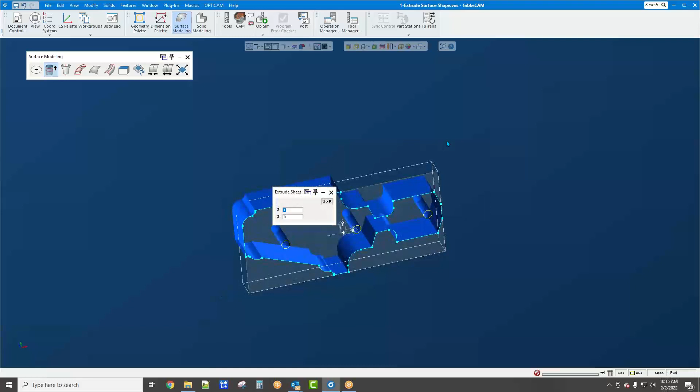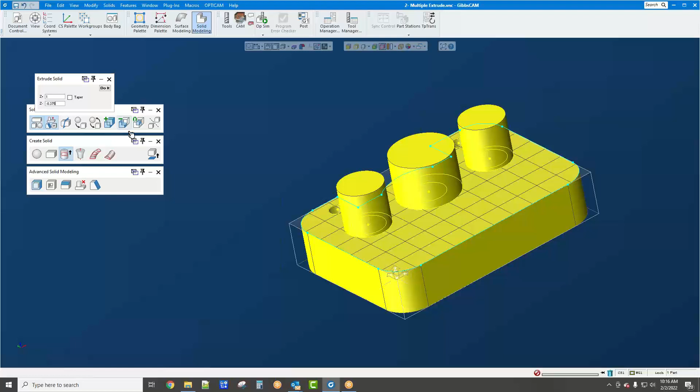So that's extrude a shape. A lot of you guys might have already noticed that we can now extrude multiple shapes. In the past, it was always one at a time. So if I go here and select, let's say, these circles, after the outside shape, of course, I can go in here and say, here, let's go -1. You can extrude those all together. And then maybe a couple C-bores, I might go -0.25 and 1 inch to give me something to hang on to. And then -0.375 here, for example. So you can extrude multiple shapes at one time. I think that's huge.

And these, by the way, all pertain to solids and surfaces. Let's open up the third one, which is extrude with taper. In the past, when we went to do a taper, you guys probably remember you were limited to one field. So now, if I select the shape, I can go both directions with the taper. So that's pretty sweet as well.

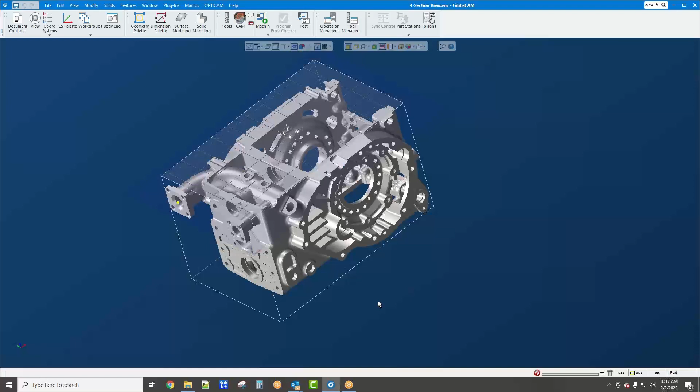This next one, the jury is kind of out on this for me, which is called section view. This is a little bit bigger file, so it takes a little bit to open. So the section view icon is up here, show section view, and it's really kind of hard to see, but you see our axis markers over here. As soon as I roll my mouse wheel on top of it, we can drag this down to see the inside of our model.

Now, to me, I'm like, okay, yeah, that's fine and dandy, but I think they need to, and I've already submitted a request for this, is to be able to pull geometry off. And just like slice plane, when you're in this mode, you can right click, if I can find it, and set section depth to like this. But to me, you need to be able to pull geometry off it as well.

But we are also able to pull, not to interrupt it, but we are able to pull geometry from that view because we can set our depth. We can set the depth of what we used to call profiler and pull geometry that way. Right. I mean, it would be nice. I agree, it's not one to one, like we just do it in one click like most commands in Gibbs, but you're still able to pull geometry off of this. So it's still usable. It's just not as efficient as we want it to be.

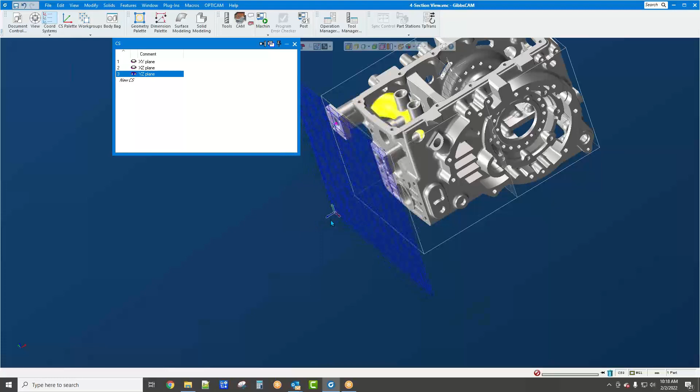So it also will work in different planes as well. So I can drag this in like this and see the inside of your model. And if I go YZ plane, same thing here. Okay. So that's section view.

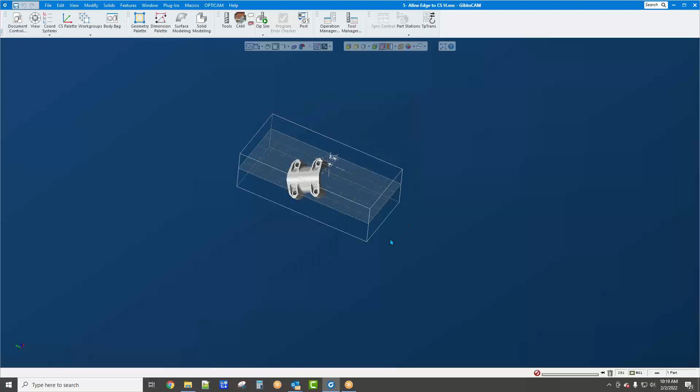This next one I think is huge, particularly for new users, because one of the biggest struggles for a new user is, hey, how do I get my model in place, in position? So we have this align edge to CS horizontal. So I can select, let's say I turn face select on, select this face and go align face to CS, okay?

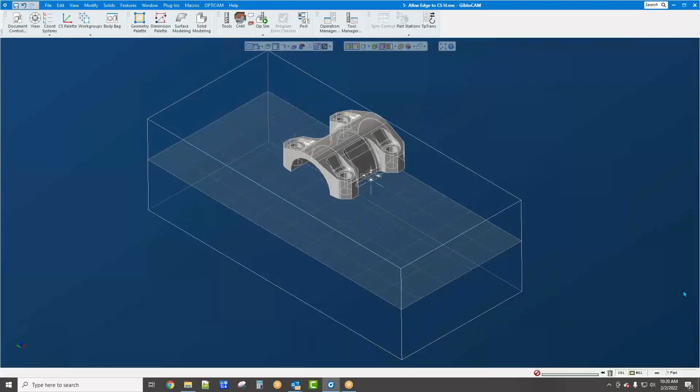Now, one thing a lot of people might not be aware of, and I forget when they added it, is if I go here and go align face to CS again, it'll flip the part over, which is pretty cool. So now if I turn edges on, I can select this edge and align edge to CS horizontal, and it will straighten that part out. So that one I think is a huge addition. So play around with it. You'll see it works really well.

The next one here is basically, I think, a quantum leap if you do any surface modeling at all. It's like, where have you been all my life? If I go here in this plane here and click create a surface, in the past it would always create it at 0. Now it creates it right where CS sits, which is really huge for those of you who use the surface modeling palette.

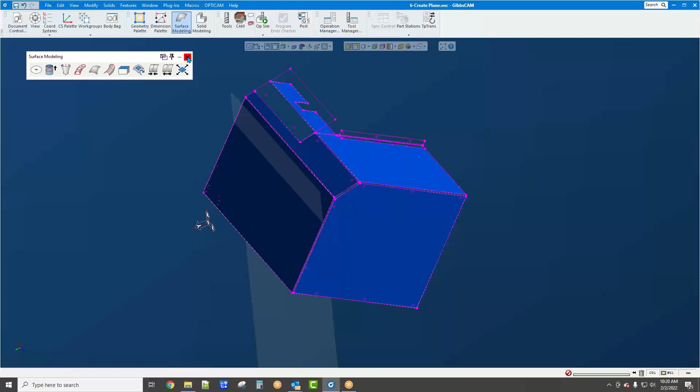So you can very quickly just create your planes and not have to translate them up from 0. Because like I said, in the past, they would all be at 0. Now they can be in any orientation, and you can create a surface based off the 2D geometry. It'll stay right where it's at. Okay.

Oh, my meeting thing's in the way. 1 second.

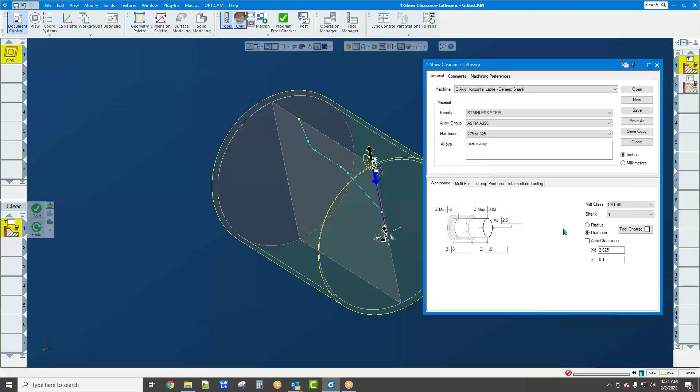Now let's go into visualization and simulation section. So I'm going to go show clearance plane lathe, which is the next function. And there's a button up here, right here, which is show clearance planes. So if I double click this, it's going to show me my clearance plane in like yellow. So if I go change my clearance, let's see, in my document control to 4 inches, let's say, it's going to show you your clearance plane. So pretty sweet.

And we can also do the same thing in mill. So if we go to mill, it's going to show you your clearance plane right here, and that's going to be your master clearance plane. So once again, if I kick this up. Okay.

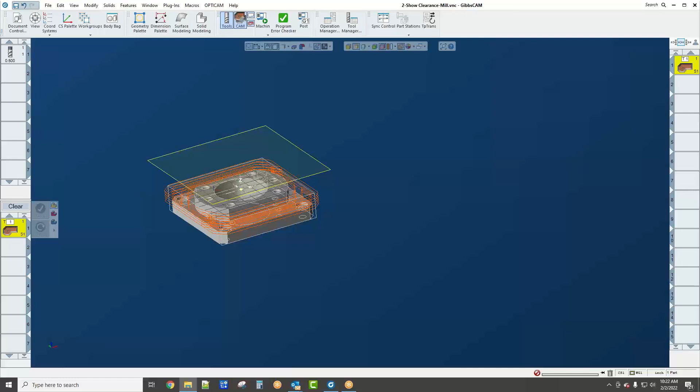The next one is multi-part visibility in all sim modes. So I'm going to go ahead and turn on OpSim. So once again, this is multi-part. So we've got multi-part duplication here. So in the simulation button, and when they say in all modes, that means in machine sim and OpSim, you'll notice this new button here. So if you choose not to show all the parts, you just click this button. And that toggles the visibility of the multi-part.

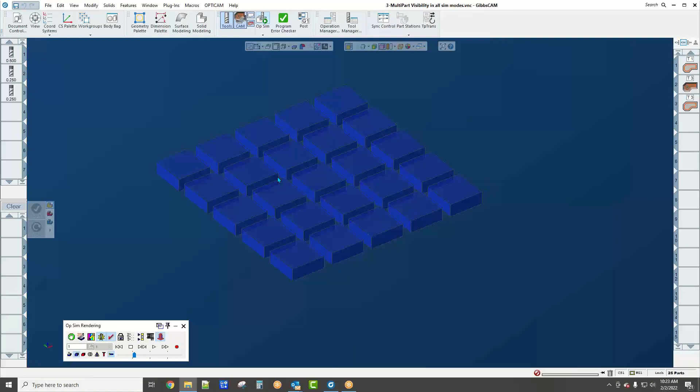The next one is pretty huge as well. MTM Sim Playback. Oh, bear with me a second. Let me load it just as a VNC.

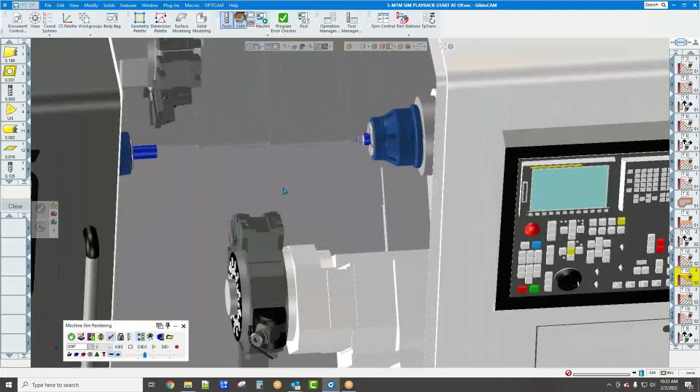Okay. When we go into Sim, let's suppose I want to sim just a particular op. I'm going to go to, let's say, op 12 in the subspindle. I'm going to select that and click play. And you'll see, even though the main is still going through the motions, it's actually showing this part as it is transferred already, which it never used to do in the past.

So you can actually pick or select specific ops and simulate just that op. I think it's pretty huge for MTM. Okay.

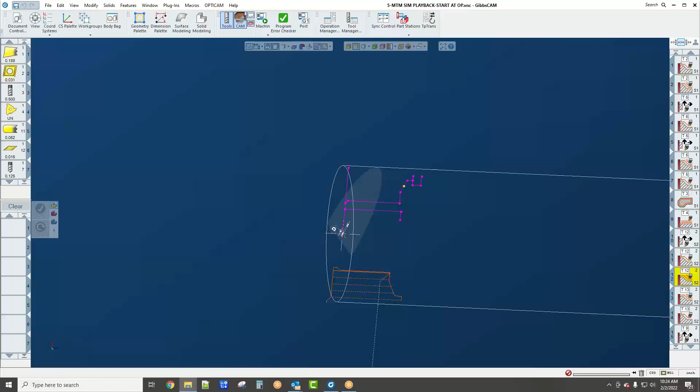Let's go on to our next section, which is kinematics and tooling. Now, I think this has tremendous potential, the ability you're going to see here. And it's what we call configurations, machine configurations. Let me turn off edges. Go to my document control. And now you'll see a new tab up here called configurations.

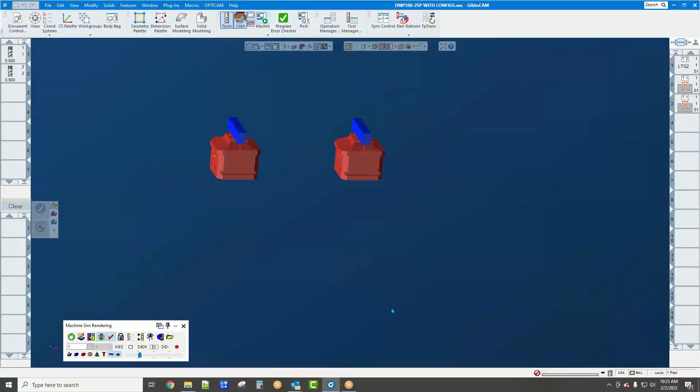So I just happen to have Nikken Indexer set up on this. And I've set up a choice for Nikken Indexer on the right side or Nikken Indexer on the left side. And it does all code out correctly. So if I turn on Machine Sim, and let's load that machine. This one takes a second to load. There we go.

So here we have Nikken Indexer on the right side of the machine. So if I play this real slow, and let's suppose you had another machine next to it, or the same machine, where several months down the road they put the Indexer on the other side. All I have to do is go in here into configurations and say, hey, I want that on the left side.

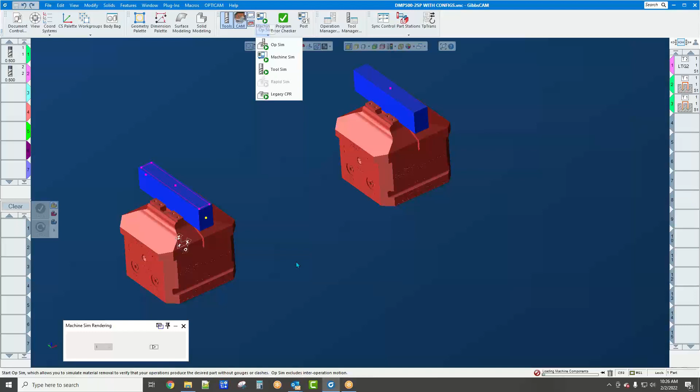So what's kind of cool about this is if you start thinking about this, you could do a lot of different machines, a lot of different configurations, which I have another example here shortly. So here's the Indexer on the left side. Just by clicking one button, we're switching configurations. So pretty sweet.

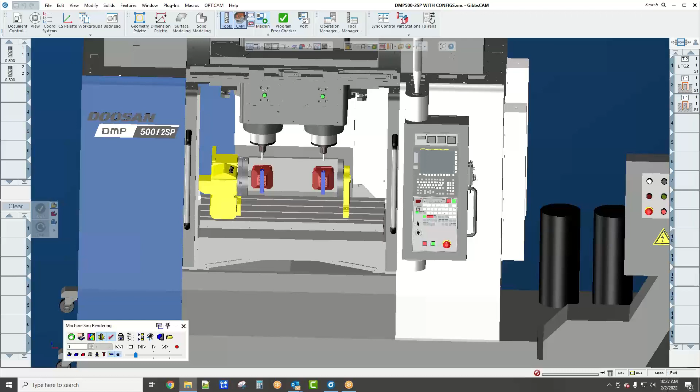Let's go on to another machine with 3 configurations. Okay, so this particular one has three configurations: indexer right, indexer left, or a part in the vise on the table, so with no indexers. So if I turn on sim, there's indexer on the right side of the machine.

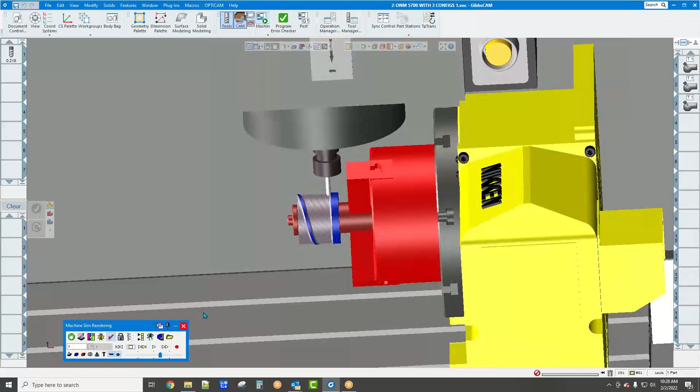Let's stop this. At least I've learned now not to try switching it while it's running. Let's go left side. There's the indexer on the left side running the same program. Let me center this a little bit.

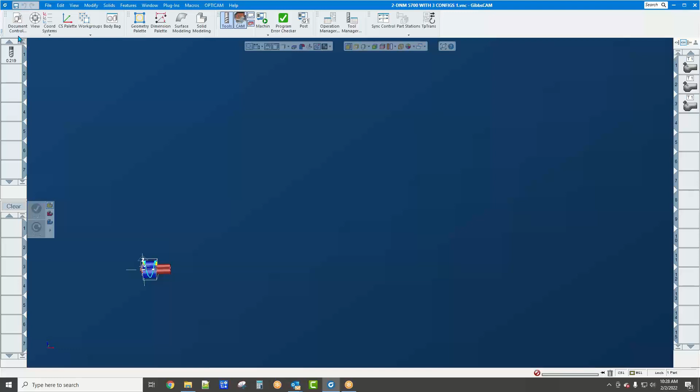So pretty sweet. Now, I did these files for an event at Ellison for GibbsCAM 2022. And the third one is just the one with the vise, but I could have put them all in the same program. I just didn't have time to do that.

So here we just have it in a vise, same machine, with the configuration part and vise. And just do a little bit of milling on that. Okay. And if you had a different configuration such as that, all in one file, the indexers would truly disappear.

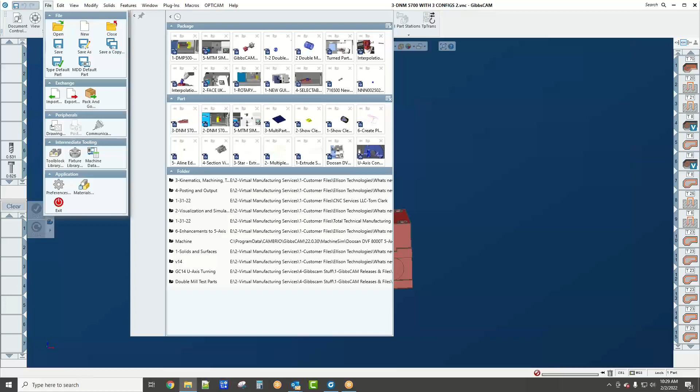One of the other new functions within the software is what we call Selectable Stock. And this requires a small change to the MDD, but here we are on a 3-axis mill, once again, same machine. And if I click cubic, our stock switches to a rectangle or square.

Okay. And if I turn off sim, switch it to round, you can have round stock without actually creating a stock model for it. Okay. And that's controlled in the document control.

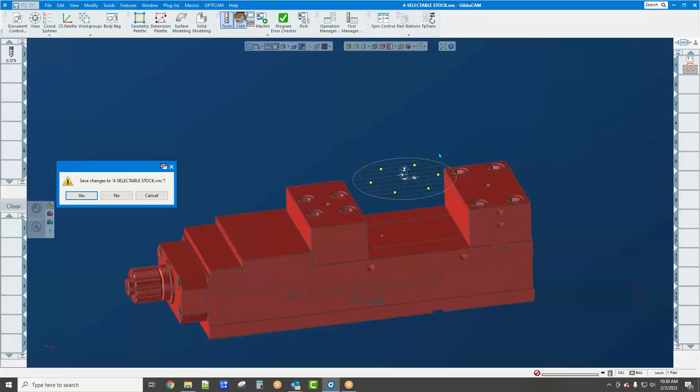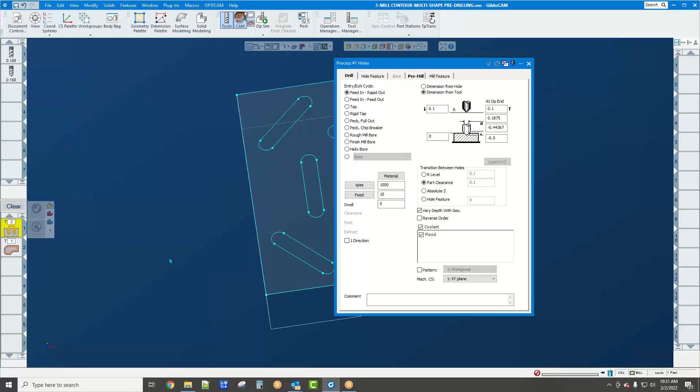This next one is contour multi-shape pre-drilling. I think this one's huge. And so I'm going to double click this op just so I don't have to refill stuff in. I'll delete it here on the right side, and I'll deselect these to show you how this works. I've got a standard drill process. Drag this over here. Standard drill process here, and a contour process here.

So here's the interesting part. Wherever I click is basically where it's going to drill the hole. So you notice I clicked on this line, on this feature. I clicked over here on this one. Let's click on the bottom over here, bottom right. Let's click on the top here, bottom here, center here, right here, and lower left here.

Click do it. Okay, and you'll notice if I go to my top view, this one's from the center, left, right, here, down to this bottom one here, this one, right, and bottom. So whatever feature that you click on, it's going to drill the hole off of that feature. So I think that's pretty sweet.

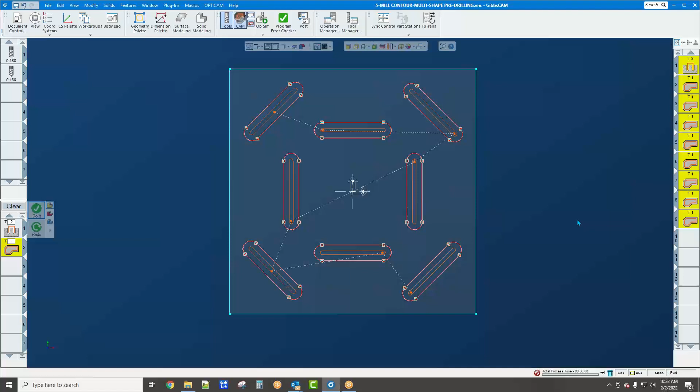Okay. Let's look at this next one. I kind of don't really understand what drove this one. Obviously, some customers asked for it, but it is square corners for roughing in turning. And I'm still trying to think of why, but I'm sure somebody has an answer out there for it.

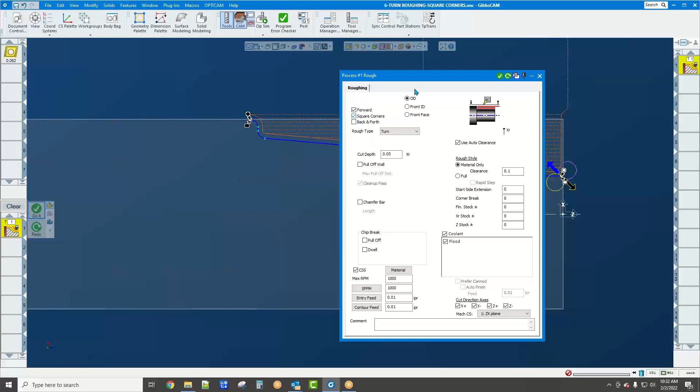But there's now a square corner checkbox in the turning. If I uncheck it and redo the op, it behaves as it did before. So square corners.

Let's move on. We're going to go to posting and output. And I'm sure you guys have noticed this is not really a new feature in V15. It isn't a new feature in 15, but we thought we would show it anyway because they've had enhancements to it. So I'm going to go ahead and simulate this first.

And by the way, this is done in Tombstone Management. So this has quite a few work offsets in here. So if I go to post it, we go to work fixtures, you're going to notice a different interface depending on how old your post is. So this is a .220A post, which 220 posts are version 2022 and above.

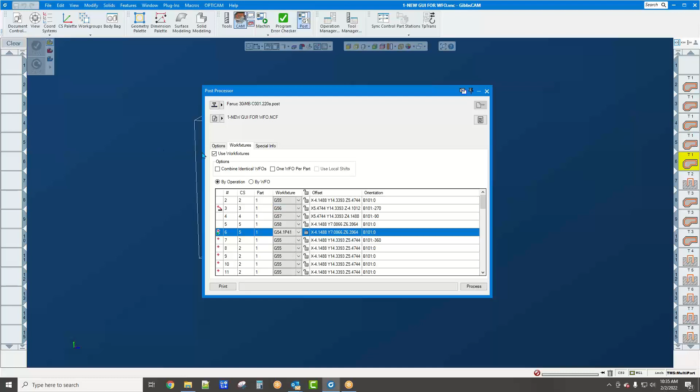And the previous post, you'll see a .68. I think it'll work in a 68 and past, whatever 14 was. Is that right, Zach? That is correct. Yep. So at any rate, if I go down here and let's look at, let's say this work offset, I can make this one 54.1 P41 if I want. And just use work fixtures. Let's go selected ops just to show you this. And it's going to output G54.1 P41.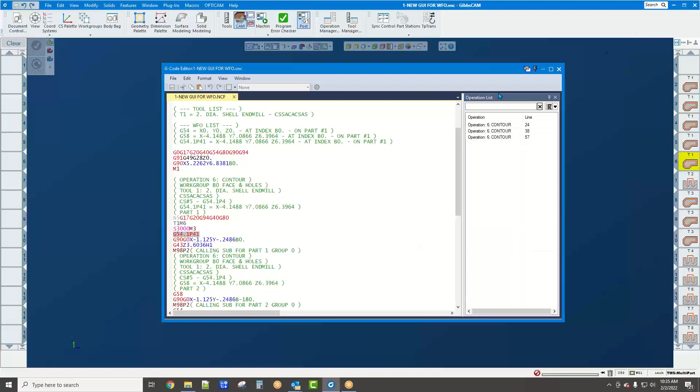Now you have several choices in here, whether you want to go by operation or by work fixture offset, okay? Let me close this out and reopen it, because we should see more than that. Oh, I have selected ops, that's probably why. Go ahead and check that, there we go. So by work fixture here, and it tells you which operations are using what work offsets, or by operation.

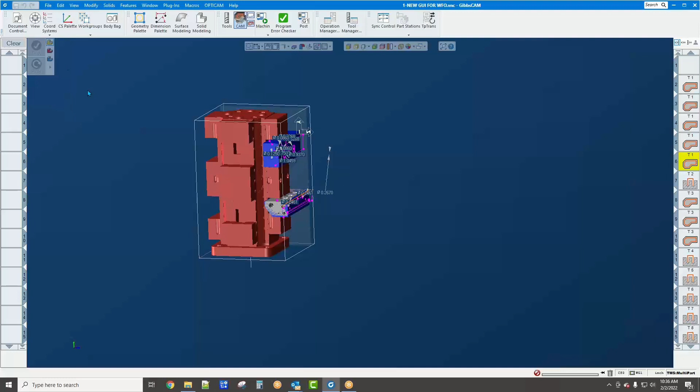Miscellaneous. I always like to, in these sessions, show some things people might not be aware of, and I don't know exactly what versions they were changed in, but if I go to preferences here, I just want to point out some things here. They did change, you know how you select rapid tool when you go to simulate? By show rapid tool right here. You now have the ability to change the color of the show rapid tool. So if I go to edit appearance settings and go to sim, rapid tool, you can now change the color. So that's one they added.

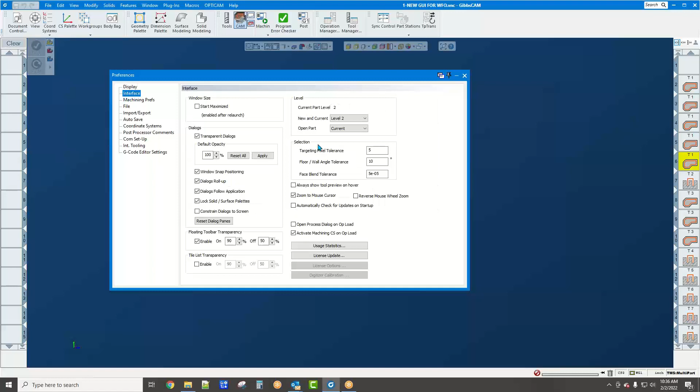Under preferences also in interface, this is one I like to show because a lot of people aren't aware of it. They have the ability to reverse the mouse wheel because a lot of people wanted the ACAD style mouse wheel zoom.

This one is huge. Activate machining CS on Op Load, which means that whatever coordinate system, when you double click an op, it's going to jump to that coordinate system. See how that happened right there? Which that is sweet, particularly those of you who do 4 and 5 axis stuff on a regular basis. You would always in the past go up here and switch to that coordinate system. Now when you double click an op, it's going to jump to whatever CS it was created in. I think that is huge. You can turn that on and off, by the way.

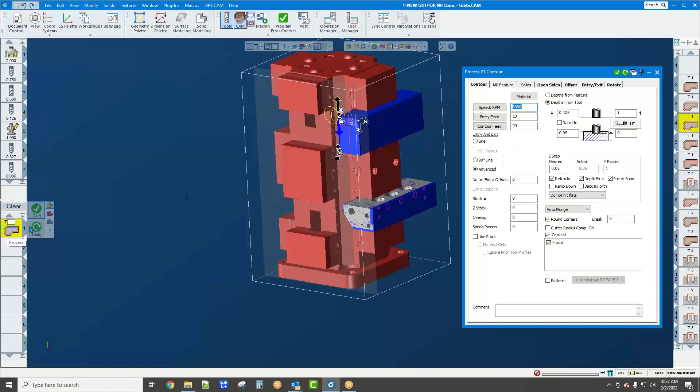If I go back to preferences, this one I turn on and off all day long. Open process dialog on Op Load. So if you ever get tired of, when you double click, let me turn on my tools here, having to go over here and open it up, and you want to change a bunch of ops in a hurry without using Op Manager, for example, when I double click here, it's going to automatically open this process dialog for me so I can either make changes or whatever I want to do.

That's one I turn off and on all day, because sometimes this will get in the way. If I'm wanting to manipulate some geometry and I'm double clicking ops and this is showing up in front of my geometry, I'll go turn it off. So that's under File Preferences. Activate Open Process Dialog on Op Load, which I'll turn off for right now. Activate Machining CS on Op Load.

One of the other functions now is called Break Parent-Child Link. So those of you who use Transform Toolpath, such as we've done here, we can now separate out individual ops so they're not with that. So if I wanted to skip these two, for example, normally you could just throw them out, I guess. But if we go in here and say, man, I got to look for this one.

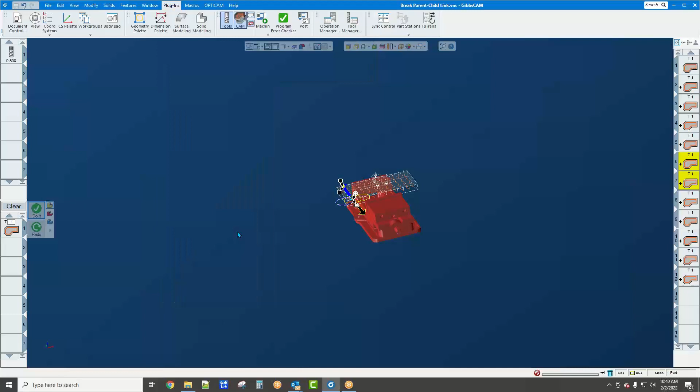Bear with me. I wonder if that's one we turn on and off. It is not. Dave, you passed right over it. It's at the very bottom of the list. Not in the plugins, in the turn on. Oh. It's like second or third from the bottom. Down here? No. Go back into add-in plugins. Not where you're at right now to turn them on. Oh, okay. Plugin Manager? Yes, sir. Tool. Oh, I did do that. That's my fault. I misread. Yeah, no biggie.

It used to be, and I don't know, I'm just either being blind right now, but there's an icon right here. I'll post it, you guys, I might have to reset my plugins. Let me see if that will fix it. Plugins, reset. I don't see it. So I will let you guys know. We could probably post that somewhere, right, Zach?

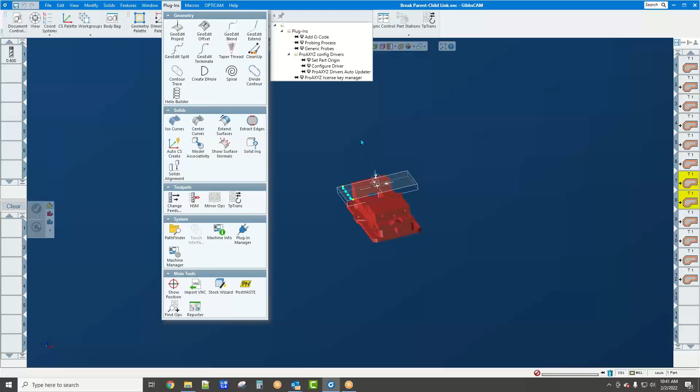Yeah. I know it was there, so when I install the new software, it might be a matter of turning it on. But you can actually break the association, the parent-child association with link. Let me try, that was a pack and go. Let me try it here with a VNC file. So it might not let you do it on a pack and go. I don't know. Plugins. Still don't see it. Okay. We will post something to that nature of what we need to do to make that active. So it will break the association to where when you double click your ops, these two would not be in there.

Let's see, a couple other things. One of the things you guys will notice when you're installing GibbsCAM, and for the first time you create a file, for umpteen years, it's always been tool length offset 1, cutter comp offset 51. They updated it to where now it's just H1D1, which is like, yay. Let's see, any of the other things, they've supported some new CAD file formats. I've covered everything else that way. So now let's go into 5-axis enhancements.

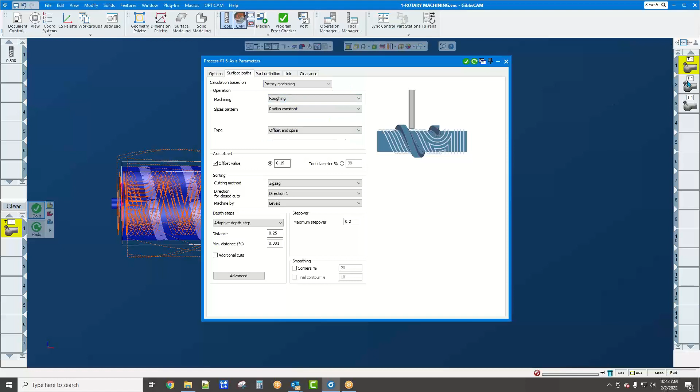This first one is really cool. It's been a long time coming. It's Rotary Machining, which is a new 5-axis option. And basically, you can just pick the model. And if you go here into Surface paths, there's now Rotary Machining. So we have roughing as well as finishing in here as well. That's still a roughing op. And last one's a finishing op. Let me show you this, where we're selecting finish. And at the end of the day, basically, I select the whole model to do this.

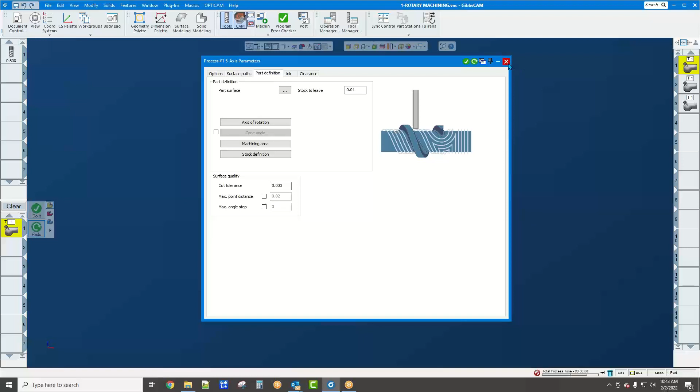So if I double click this, toss the stock off the screen, and bring the model back out, and open this up, Surface paths, let's go part definition, part surface. I just picked the whole thing actually for now. Click OK and redo it. I probably shouldn't be processing 5-axis toolpath in a webinar. There we go. So, and I had too much picked. I just picked the whole model.

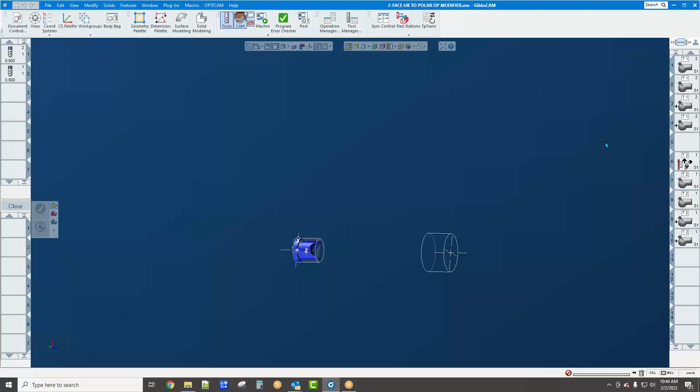This next feature is something really we've been asking for a long time. Let me open up the pack and go here, because I have machine sim along with this. Okay. In 5-axis path, whenever you're coming straight on, in other words, we're coming straight on here from the XY plane, if it's a flat surface, the 5-axis module will toolpath it in XY moves rather than polar cylindrical, off-center polar cylindrical, if you will. So there was a plugin that you would have to run in the past. It was under plugins here, and it would go Face IJK to polar. And it would be right in here typically. Well, now it is a standard operation modifier.

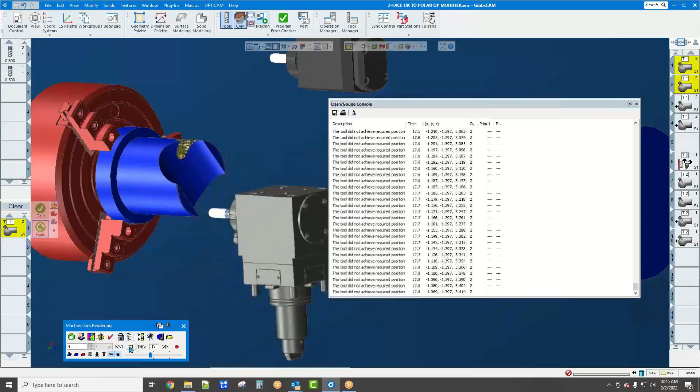So this first operation is being done with a lower turret on a twin turret machine. So if I simulate this, you're going to see, and by the way, the lower turret has no y-axis, okay? So what it's going to do is give us errors that it can't achieve the position, which we are seeing right here. Tool did not achieve required position. So basically, all I had to do, let me stop that. All I had to do to correct that was I did the same ops again right here. These are both identical to the first ones.

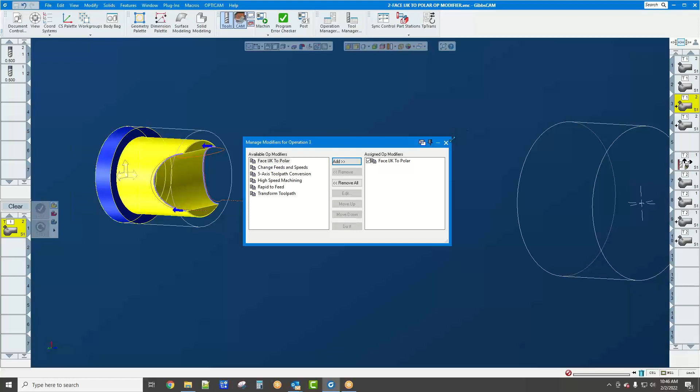But if I right click on here and go operation modifiers, you're going to see Face IJK to polar. So once you've done this operation, all you have to do is select this, add it over here, and click do it. And the result will be, rewind, and I'll play just these specific ops with the lower turret. Now, with the upper turret, if we go here, the upper turret does have a y-axis. So if I simulate these, it's going to go X and Y.

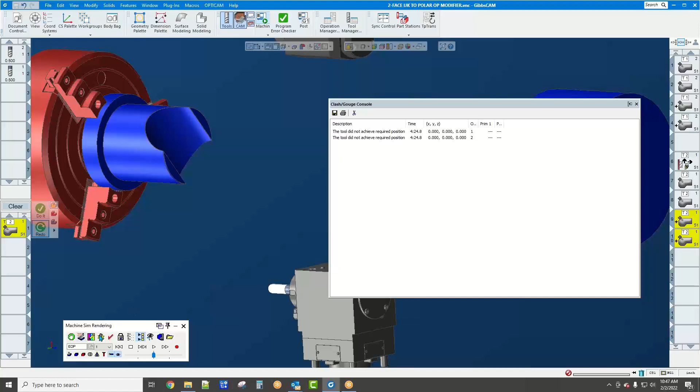And if I run the same modifier, rewind, the reason we're getting that error is because it's seeing these ops here too in the beginning. And that's why we're only seeing op 1 and 2 if you look there. So by applying that op modifier to this path, it switches it from XY to polar, if you will.

This next one is a pretty cool feature. It's called deburring multiple cuts. I'm sure a lot of you guys will appreciate this. So here, as you see, we've run the op modifier on that. That's what the pluses are, okay? But in here, we now have the ability to do multiple cuts in a 5-axis deburring op. So I want a constant width of 40 thou. I want four passes, okay?

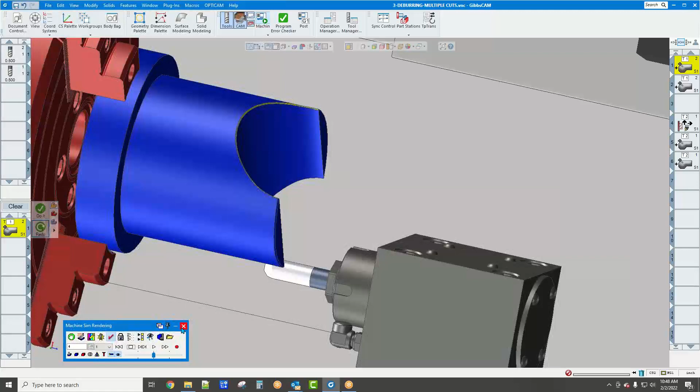So if we turn this on, now, in anticipation of guys saying, well, how come it keeps rotating the C axis to do that? That is just out of my laziness from the standpoint of I picked them both, okay? If I just wanted to do 4 passes on one side first, which realistically you would do, I would just pick this one here

as, let's see, part surfaces. And I should be good right there. If I just do it here. And click OK, and then go edge definition, pick this edge and click OK, and redo. Now it's going to do those 4 passes just right there. Okay.

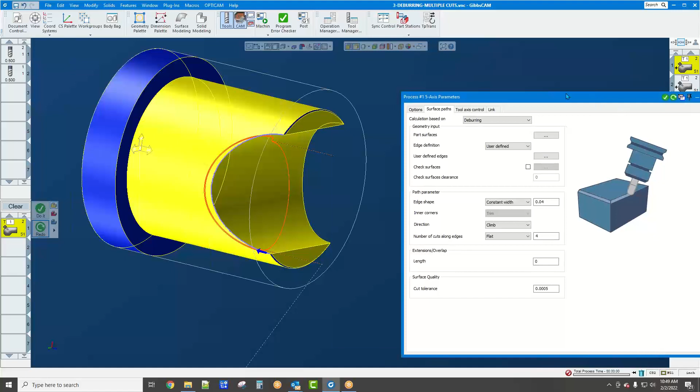And I did the same thing with both upper and lower turrets. This one is doing both of them, and then both of these at the same time. So if I sim these, you can skip on selected ops. So if you just don't want the C to rotate like this, just do them one at a time. So that is multiple passes for deburring.

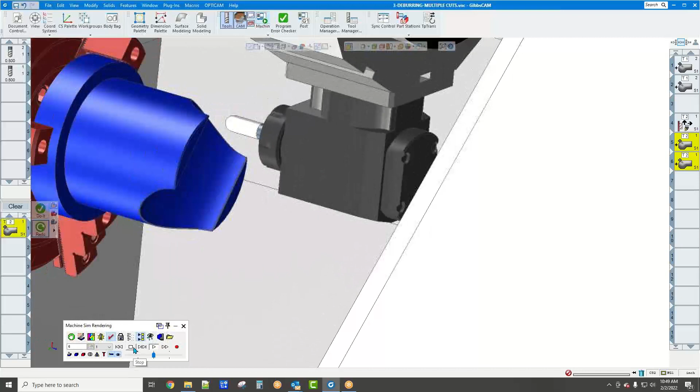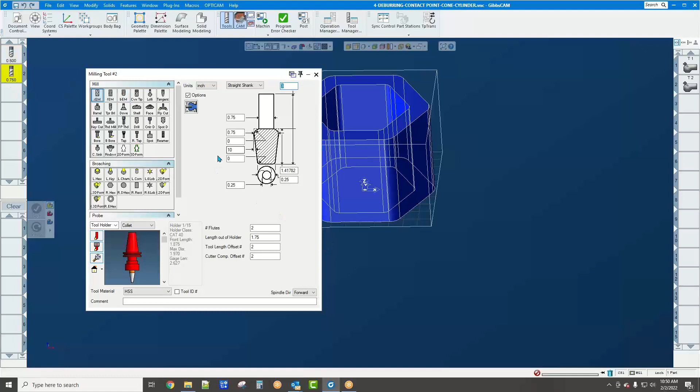This next one's really cool as well. Wrong one. Oh, no, I did multiple cuts, contact point, yes, okay. So here we've got a ball mill, and we've got a tapered end mill. And we're gonna break the edges all the way around here, so you now have the ability to control the contact point. If I go into surface path and go to tool axis control, here we go, fixed tool contact point at cone or cylinder.

So I got 0.5. That means this end mill, the first op, the ball mill, is going to cut a 1/2 inch down. And then the contact point on the second tool, I think I left it the same. And this is a tapered end mill as well. If I go tool axis control, yeah, 1/2 inch fixed contact point. So we go to play this. I think this one's huge as well. Oh, let me turn off skip on selected ops, sorry.

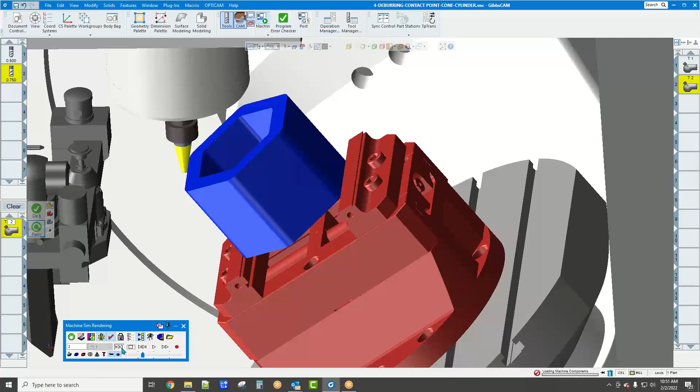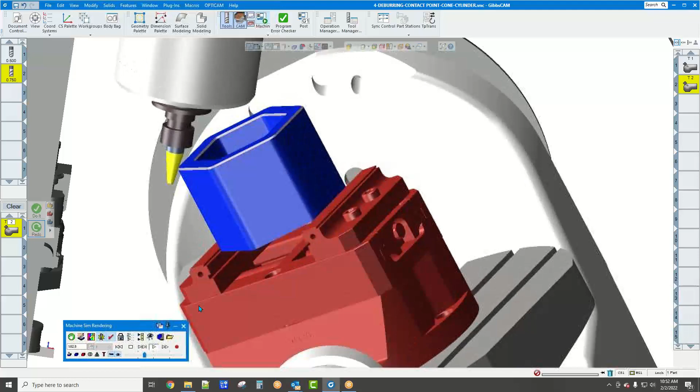Okay, here we go with the ball mill. 1/2 inch up the ball mill. We're cutting that chamfer, or breaking that edge, if you will. And then now we switch tools. Oh, same tool, I'm sorry, on this one. Forgot my own demo. We're still on op 1. Then we switch tools and go to a tapered end mill to do the same cut. Okay. That's that one.

Bear with me, I'm moving my menu thing out of the way here. Contact point, cone or cylinder. Next one is a change to geodesic machining in 5-axis. And it's called Propagation Direction. So here, if we look, open this up, I've got surface path is geodesic machining. Pattern type is parallel to curves. If I go to this advanced here, we now have the ability to say propagation direction relative to the guide curve. In this case, it's right.

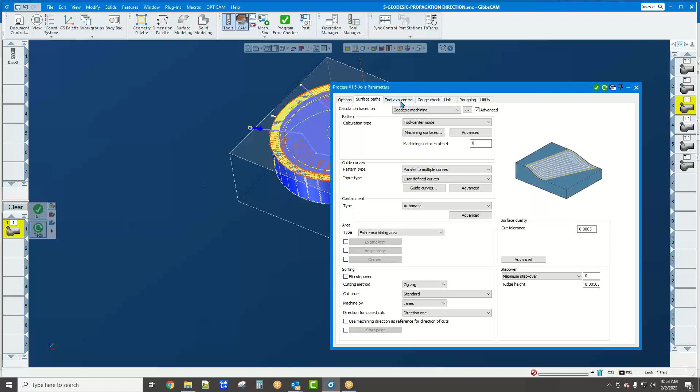So it's going to cut that on the right side of that curve. The next one, I'm sure, is the left side of that curve. The next one is the left side or right side of the curve on both lines together, which if I go here and go advanced, right, and I'm imagining that the next one's going to be left both together. If I go here, go advanced, it is left both of them at the same time. So this is doing the same thing with the circle. This would be cutting left, I'm assuming. Yep. And then the other option is right.

So basically, in geodesic machining, you can now define a curve to cut along and either cut to the left or the right side of it. This next one is called tilt surface normal.

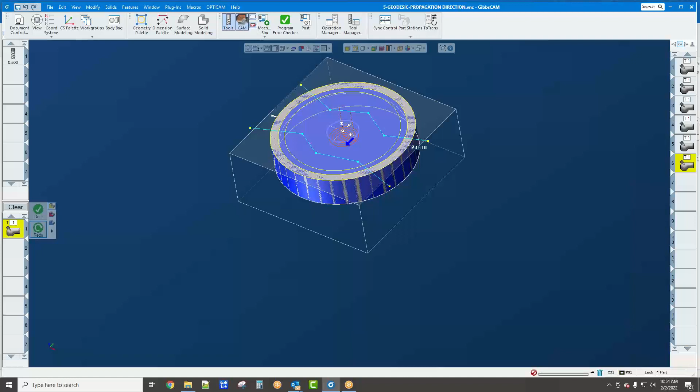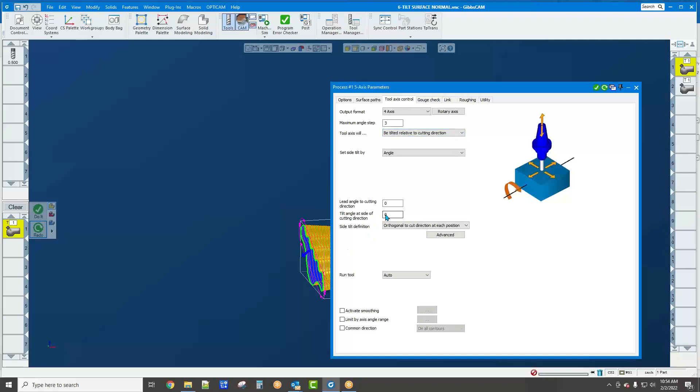So here we've got this crazy shaped part. The way GibbsCAM would normally cut this, since we have tool axis control, it's tilted relative to cutting direction at 0, keeping the tool tip normal. Now there's a new feature for tool axis control, tilted with fixed angle to surface normal, using this reference surface. So it's tilted in reference to this surface instead of following all these whoop-de-doos around. Let's go ahead and simulate that.

Zach, in case you're wondering, whoop-de-doo is an old term that us older guys used to use. He's not listening. I'm just ignoring.

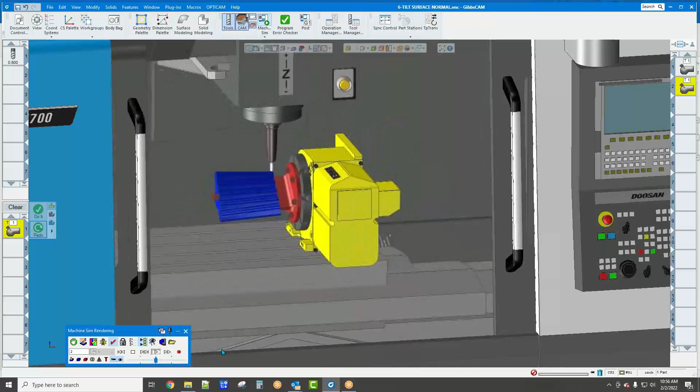Okay, so here's the first stop. I'll show you the difference once we use that other surface. Let's rewind, skip this first op, and play this one. This part shows the difference well.

Okay, so now on the GibbsCAM 2022 stuff, that's all I've got.

Zach, is it something you want me to go into some of the V14 stuff to highlight that people might not know about? Yeah, in just a second though, I wanted to see if there are any questions that came up from the peanut gallery, so to speak. If you do, I'm going to unmute, which could be a dangerous thing, but we're going to do that and see if anybody has any questions, see if the button actually works this time.

Not sure why it's not. It really wants me to go through and manually hit everyone. Weird. Yeah, it is not unmuting everybody, or at least it's not showing me. Does everyone still show as being muted? Because I could click it a million times and it's not doing anything.

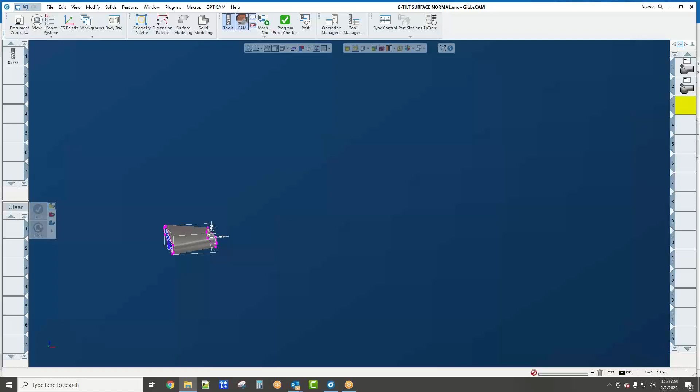Zach, I do think you have everybody unmuted. Okay, it's just simply not showing it to me. I think there's 6 or 8 that are showing unmuted, but the rest must have their mute on by themselves. Oh, okay, all right. So even if I click it, they would still have to unmute manually. Gotcha, makes sense. Correct. And Dave, that parent-child thing, I believe you have to drag that icon onto one of your bars because I don't think it shows up on the plugin menu. Yeah, it used to, I know that. It should be, it's always been listed as a plugin for us. Yeah, it's listed under a plugin, but I still have to drag it out of customize. So it's weird, a lot of people are unaware.

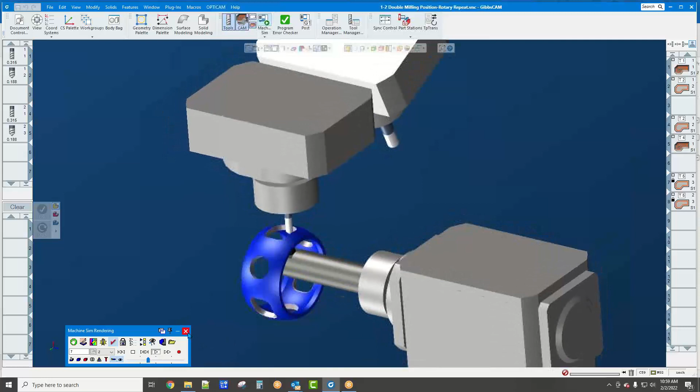This one just shows, and I'm just going to show capability basically with these files. A feature that was new in 14 is double milling, okay, on an MTM machine.

Another thing that we support that a lot of people aren't aware of is U-axis turning, which I believe is also 14. So if you'd have a head something like this, we can fully support this. Slow it down a little bit.

And this actually does quite a bit of stuff here. And so this is moving in and out with the part.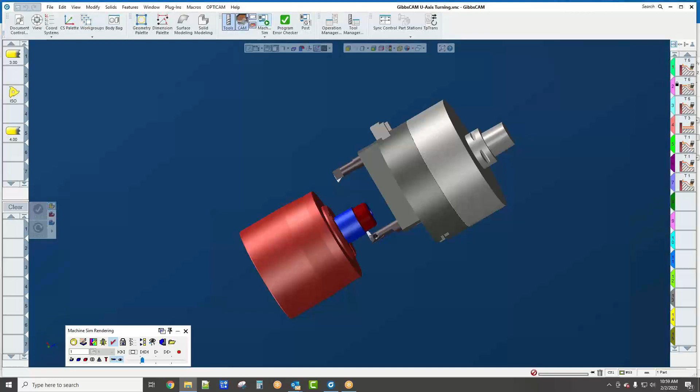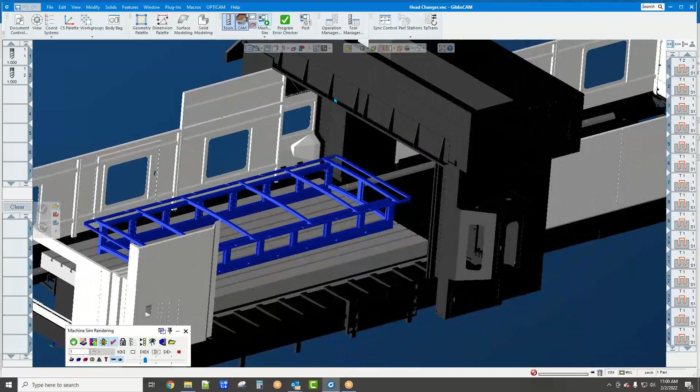Another one that is really cool, not a lot of people have these machines, but for a big gantry style machine, as an example, we support head changer machines. So this is a big old Toyota where it goes over, changes heads to start with to a vertical head, drills some holes, switches heads, changes tools, goes over, changes heads, loads the tool, goes back, drills some holes here, rotates to the other side, drills some holes here, rotates 90 degrees, and does the other side. So we have the ability to change heads, and it really is pretty simple. Here's right angle, here's a vertical orientation, and that's really all that's needed to be done.

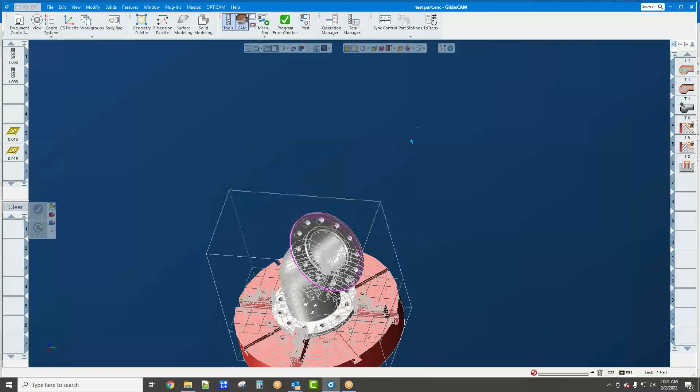We also do interpolation turning, which this happens to be on a 5-axis mill with a little bit of 5-axis tool path as well as turning on this machine.

So here we go through first and mill that flange. I'm going to zoom in here so you can really see what's going on. And then mill a chamfer around the outside. This starts really fast, so I got to slow this down. So here we are turning the OD, and obviously you would have to have a programmable spindle for this. OD and face.

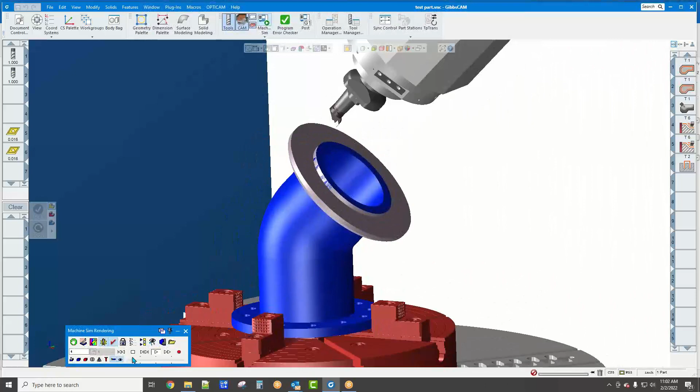And that's just doing multiple passes going in. And then we switch and do some boring on the ID here.

That as well, so that is interpolation turning. I have another example of that on a horizontal, which is becoming somewhat common, or more common anyway. So if I turn this on...

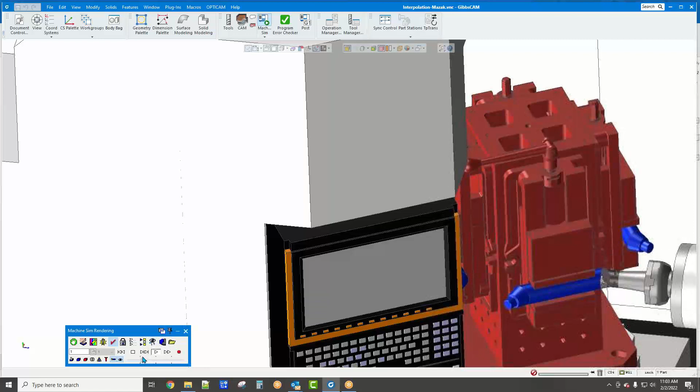We can turn that OD and chamfer, and the angle as well. And then we'll rotate and do the other side.

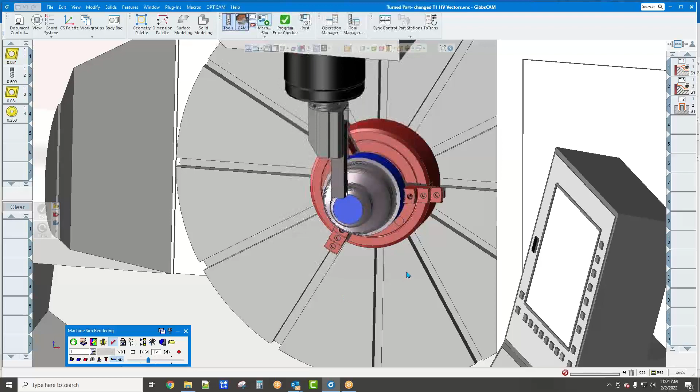And so this first one is roughing it horizontally and then vertically finishing it, okay?

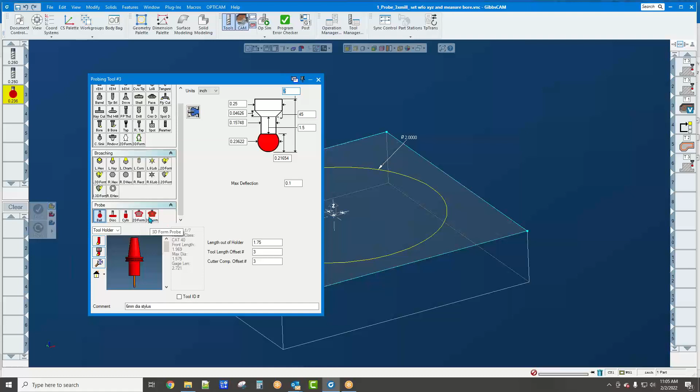On the probing side, now the probing files I don't have in order, so you got to bear with me. We have a suite of probing tools here. You can also create your own probing tool, if you will, or a custom form, 2D and 3D as well.

And we have the ability to probe for both work fixture offset and for measurement. We also have the ability with go-tos to measure if it's undersized, for example.

We can go to here, for example, we can say if it's undersized by a thou, we go back to this tile here, which is 4, which is a go-to, and it'll go back and recut that and remeasure again after that.

And there's all kind of functionality here as far as whether you want to do 3-point, 4-point, what the angles are. You could set them at different angles. And so in the long run, touching the top of the part, setting the work fixture offset.

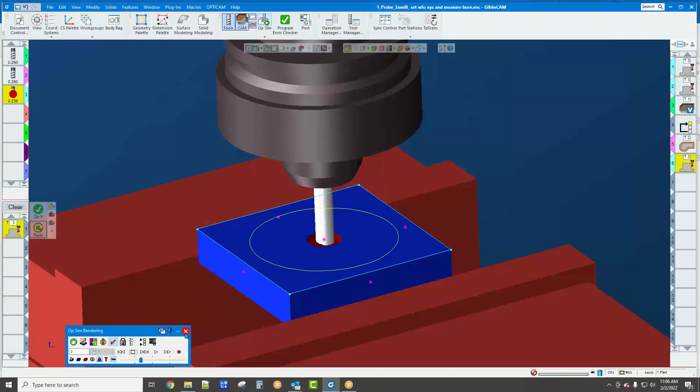And this is just going to be cutting your, or using the Renishaw software within the control to do this. Same file, basically. In-process probing right here is another example.

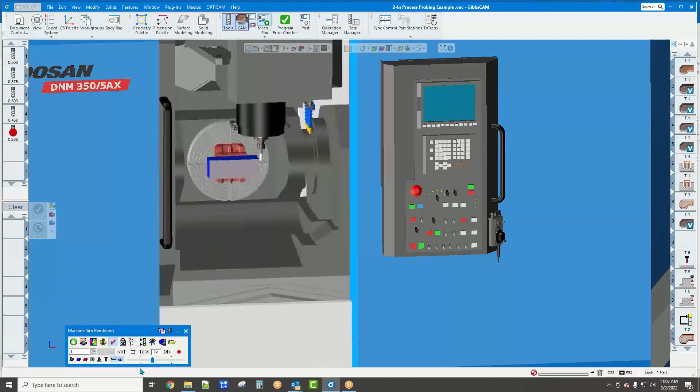So we're going to go ahead and do a little bit of VoluMill path. So they were probing it after that. That's what these little dots are. Sorry, that went a little bit quick.

I can slow this down a little bit and actually skip ahead. And there we are probing that hole after it's milled, with a couple of go-tos when it's measuring it to go back to a specific location to recut.

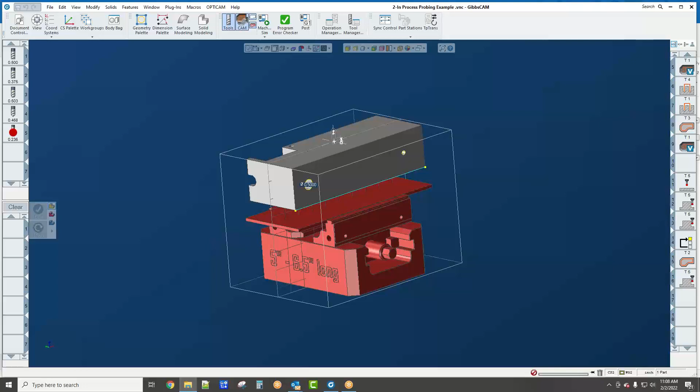We also have, for those that aren't aware, as of V14, a new wire package. It's called OPTICAM, which was what was driving the surface modeling to have the ability to extrude, which this is all completely solids based now.

And those of you who have used the old GibbsCAM wire, I intentionally use this particular demo because it shows really well, and you know how brutal it was in the old software. Basically all I did here is click the surface model, and let's go into graphic simulation. Pick the surface model, and it finds everything. So we not stop there, okay?

And that's our GibbsCAM EDM software that's new within GibbsCAM. Anything else you can think of, Zach? That's about all I have. No, there's nothing additional I could think of on these two items.

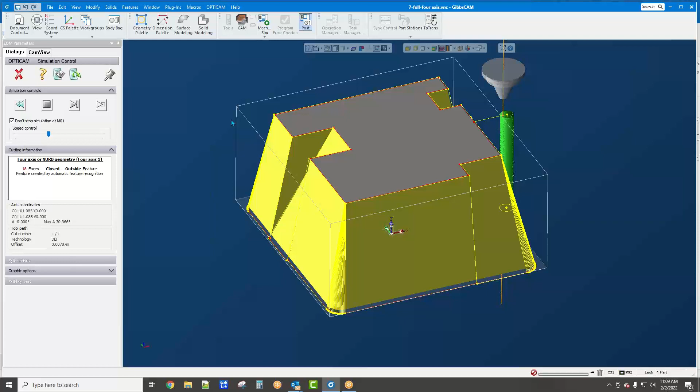One of the questions that came up that maybe you would have a little more insight on—if you could think of anything new added to either just the 2.5D solid based portion of the software through V14 or 2022, or more specifically on the mill turn side. Short of the square corners addition, I couldn't really think of anything else that was really exclusively for that portion of the software, those two portions.

So, yeah, 2.5D solids—I really can't think of anything specific. Exactly, that's kind of where I was at too.

The one thing I did think of was VoluTurn being added as a good addition on the mill turn side, and obviously it would have to be solids based. Well, actually, no, it wouldn't for that particular module. So that's something that's standard for everyone now—VoluTurn. But other than that, no, I can't think of anything.

So a lot of people, Zach, might not be aware that step is standard as well. There's actually a couple things that I wanted to cover before we did get off, and then also a few more items that I will cover.